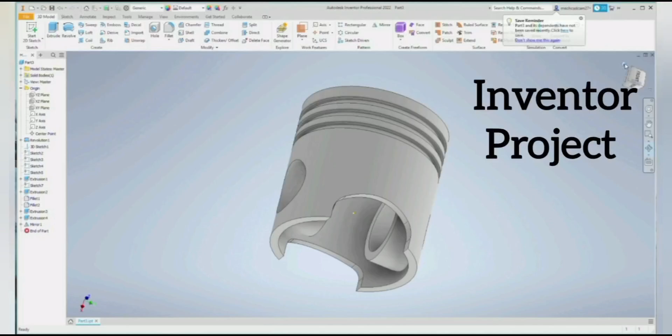First, select the line arc. Draw a line of 10 mm with a height of 58 mm. Then take the second line arc and draw 38 mm at 90 degrees. Then draw a line of 90 degrees to 90 mm.

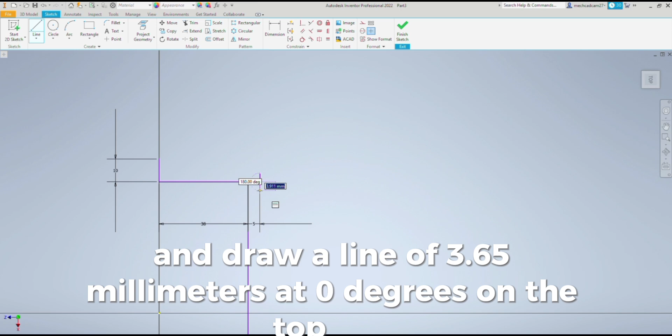Select the line arc and draw a line of 3.65 mm at 0 degrees on the top side. Then, after removing the dimension, take the second line command and draw a line of 180 degrees at 3.65. Then draw a line of 3 mm at 90 degrees. Then draw a line of 4.3 mm at 180 degrees.

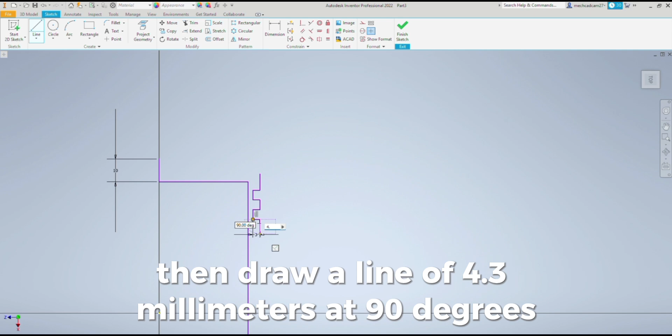Draw a line of 3.65 at 90 degrees. Then draw a line of 4.3 mm at 90 degrees, repeating this pattern. Draw all the lines in this way.

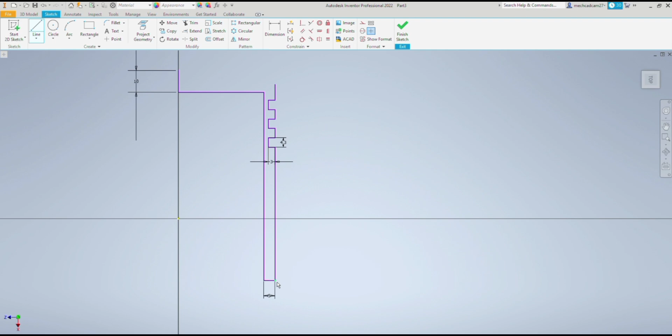Then select the arc command and draw a 45-degree arc. Then give the drawn sketch a finish sketch. Select the revolve command, select the appropriate axis, and rotate 360 degrees with the revolve command, and our part is ready.

Now select the circle command in 2D. Draw a circle with a diameter of 33.8 mm. Then give the finish sketch. Extrude the circle with the extrude command.

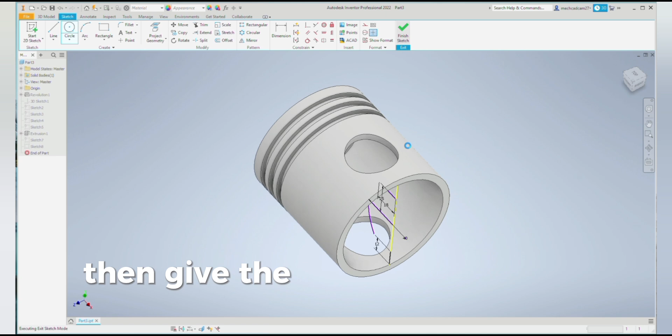Then go to 2D sketch again and draw it as shown on the display by taking the XY plane. Then give the finish sketch. Then select the extrude command and extrude the sketch you drew. Keep the extrude size to 36 mm.

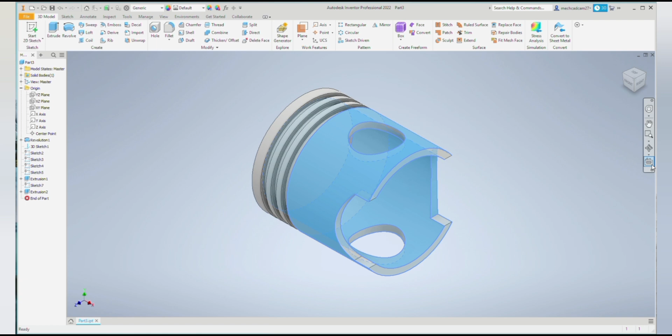That is, the display appears. The part will be ready. Then arrange the part as it appears on the display.

Then select the fillet command and draw a fillet of 10 mm as shown in the display. Then draw a fillet of 10 mm on the left.

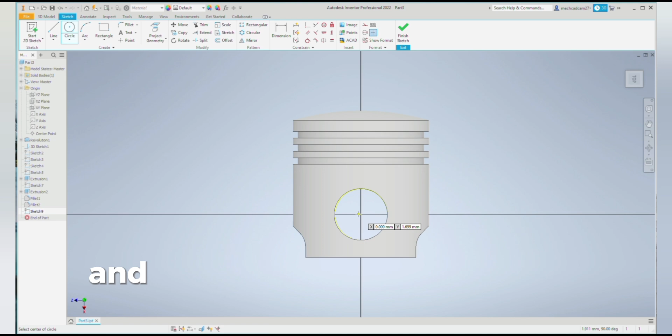Now select the XZ plane and select the circle command and draw 45 mm of the circle. Then click the finish sketch. Now select the extrude command. The circle we drew is visible in the display. Extrude it in that way.

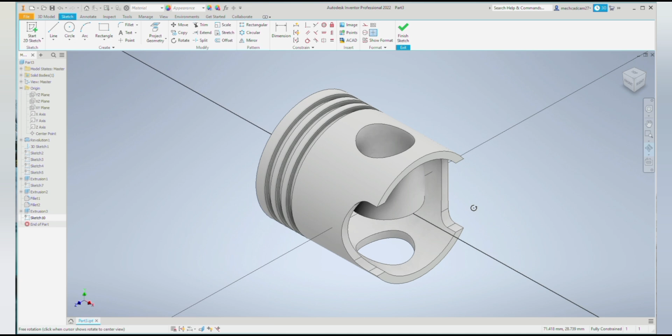Now set the part as shown in the display. After that, go to the 2D sketch and select the project geometry command. Click on the extruded circle. Then give the finish sketch.

Reduce the size of the circle we drew, as shown in the display. Follow that and create the part. Then set the part properly as shown on the display.

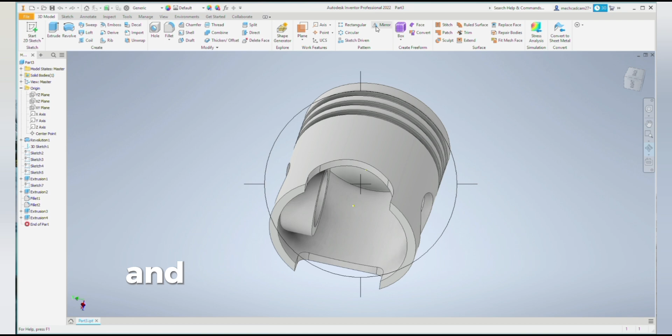And then select the mirror command. Then click on the XZ plane to mirror. After that, your part is ready as per the display. Thanks.